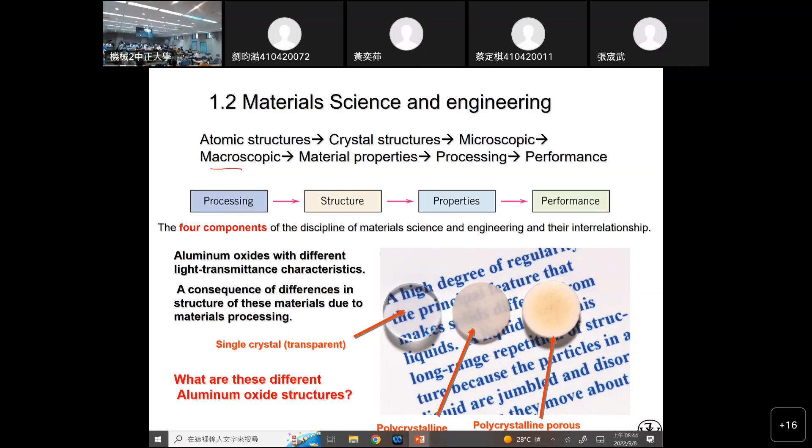Then we are going to talk about the material selection process. How do you select a proper material for your specific application? For example, if you are an engineer in an automobile industry and you have to choose a material for a certain automobile shaft, how should you select it? So first, application—you have to determine the application.

So first you have to determine the required property. What is the required property for a shaft? The shaft must exhibit certain strength. Strength is the mechanical property—we have yield strength or fracture strength.

Yield strength means that the material deforms. If the material deforms, then it becomes useless, right? If a car's shaft deforms, it can't be used. So the required property is the yield strength—the external force you apply cannot exceed the material's yield strength.

So you have the property. Here we were talking about mechanical property. Then in another course, strength of materials, which you are also taking—that is 材料力学, right? So you are taking the course Strength of Materials.

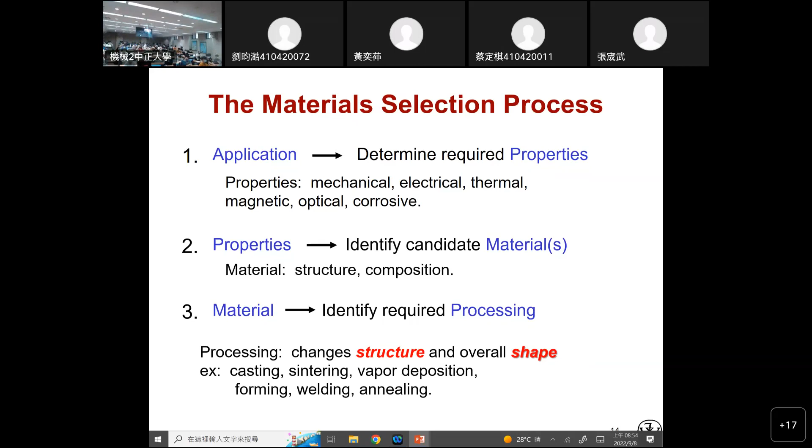And welding, 叫做焊接: you join two pieces of metal together with the electric arc, because the electric arc melts a part of the material, so that the two parts of the material will be joined together. And this is the welding process. Or annealing. Annealing is a kind of heat treatment. We are going to deal with that later, so I just skip that.

So we are going to study the crystal and the crystal structure in chapter 3, 4, 5, and if we have already learned the structure, then you will find why the material behaves hard or why material behaves soft. It is because of the structure. So we are going to learn the mechanical property in chapter 6.

Okay, and in chapter 7, look here at this vocabulary word, defect. What is the defect? 缺陷. Crystal structure or periodic structure is a perfect structure, an idealized structure. Just imagine that if this class is completely filled with students, there are no vacancies missing in this classroom, and this classroom becomes a perfect classroom.

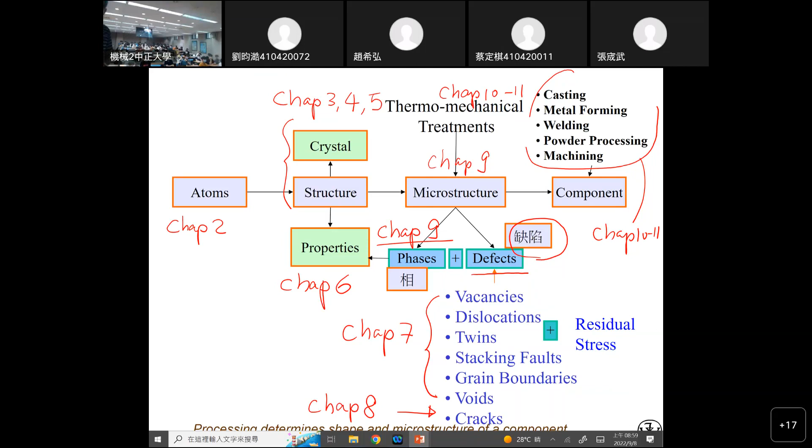And here you see, if I put a piece of steel into a furnace, and I heat the steel from room temperature to 1,000 degrees C, or even higher, 1,200 degrees C, so that the material is very hot and glows, okay? 会是热的，整个都发亮的。

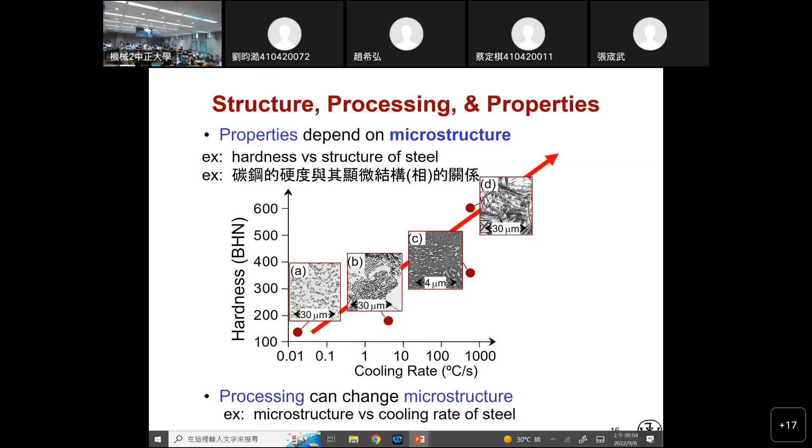For example, one of my graduate students told me many years ago, he graduated from graduate school and then worked in a company called Jong-Ning, okay. And during that time, Jong-Ning also developed a cell phone, not a smartphone at that time, 20 years ago. And maybe when you were a child, you could still remember a cell phone was quite complicated, and you had to unfold the case and press it.

Okay, and there are also cell phones with folding sides. So there are a lot of mechanisms on that cell phone. 就以前的手机哈，跟手机有许多的设计的这个机构 machine design。 And that student came to me one day and proudly said, oh, sir, look, now one type of the cell phone is quite famous in the market.

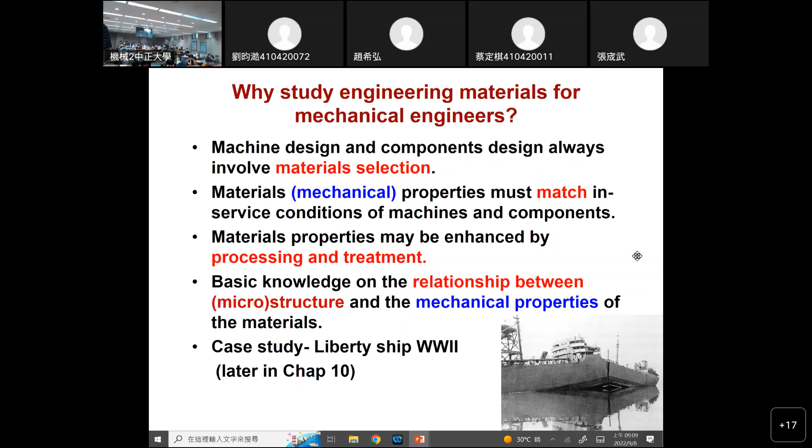But it's very dangerous or vulnerable if the ship is on the sea and suddenly it breaks into two; it will lose property, it will lose lives, right? So this is the goal of mechanical engineering, to learn about materials.

Now we are going to go into the topic of material. So classification of material, okay? Classification 分类. So basically, there are four categories of material. The first one is metal, and the second one is ceramic. The third one is polymers, and the fourth is composite. Composite means the combination of all these three.

Metals: steel, aluminum, all kinds of metal, so you know. And ceramic. More ceramics are applied in engineering or in advanced engineering materials. 陶瓷材料. Yeah, ceramic material is very hard. However, ceramic material is brittle. What is brittle? Brittle means ceramic material is quite

I could not write properly. Brittle. Okay, I'll write it later because there's some problem with the writing.

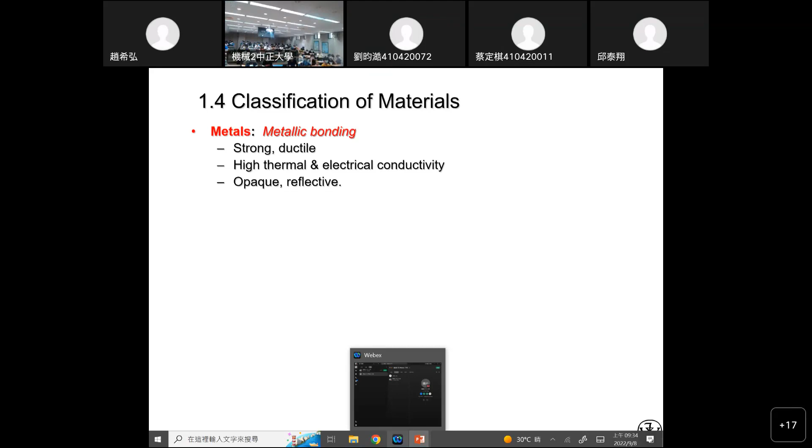And polymer: most plastics belong to polymers, or rubbers, natural polymer material, 橡胶 rubber. I just mentioned PE, PVC, PPT, and so on. Polymers have covalent bonding. Covalent bonding 叫做共价键, and it means that atoms share electrons with other atoms, so that they build a covalent bond by sharing electrons.

And polymers are typical plastic materials, 塑胶材料, and they are soft, they are ductile, and they have relatively low strength, not as high as metallic material, and low density. Low density so that it is light, and some of them have density even lower than 1, so that many plastics can float on water.

And they are thermal and electrical insulators, so we cover the electric wire with polymers, with plastic. And we also use plastic as thermal insulator. For example, your cooking pot handle uses plastic material to protect you from burning.

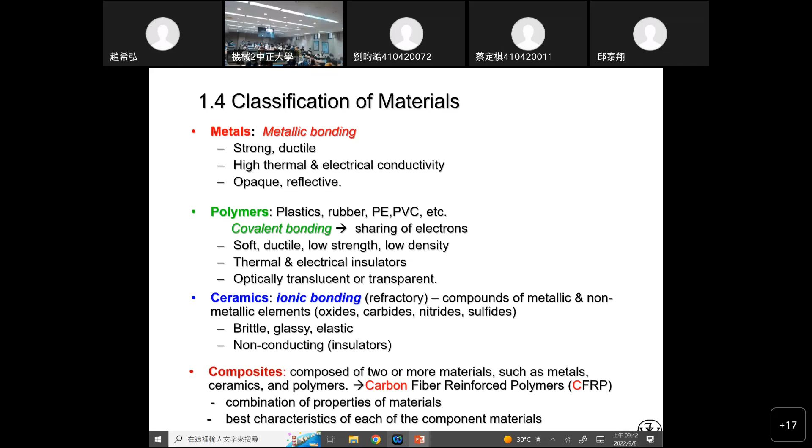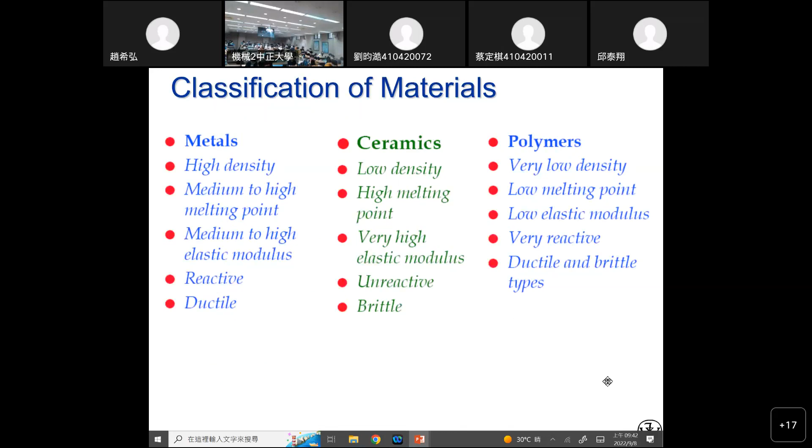So during steelmaking or other metal making, usually the slag is floating on the liquid metal because of its lower density compared with metal. Slag is a ceramic material, so its density is usually lower.

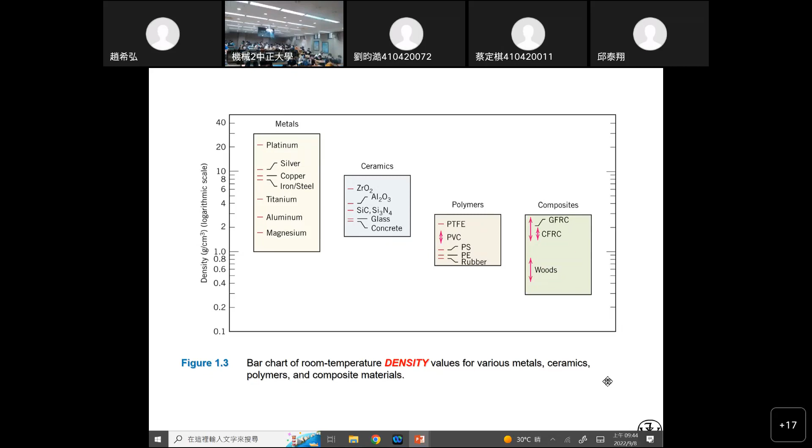And some polymer materials may have density as low as 1, so that this material will float on water. And composite depends on what kind of materials you're combining, so its density lies in quite a wide range. And then we see here the stiffness. What is stiffness here?

Stiffness is actually the elastic modulus, exactly like the spring constant. But in strength of materials we are talking about Young's modulus, that is the elastic behavior between stress and strain. Elastic means if you apply the load and it bends, and you release the load, it goes back to its original shape.

So the higher the elastic modulus or stiffness, the harder the material will be. Metal and ceramic both have very high stiffness, and polymer is quite soft. Look here, it's not the regular scale, it's the log scale. It's pretty high for metal and ceramic, quite low for polymer, and composite is the combination between them.

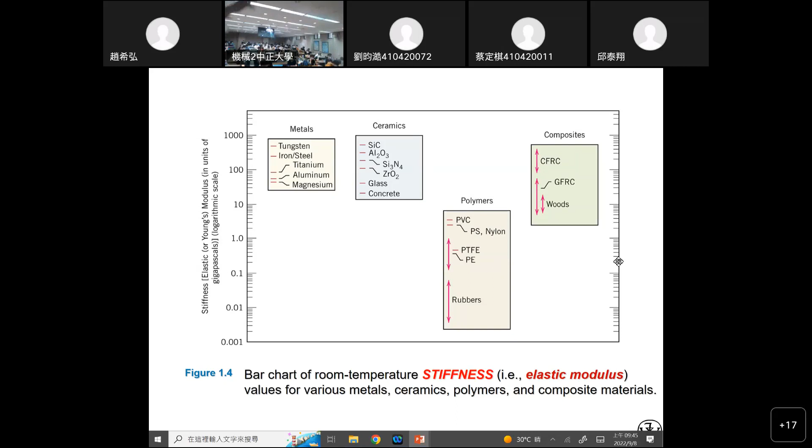And then the next property is strength. We express that on the scale of stress, that is force divided by area, and what we get is called

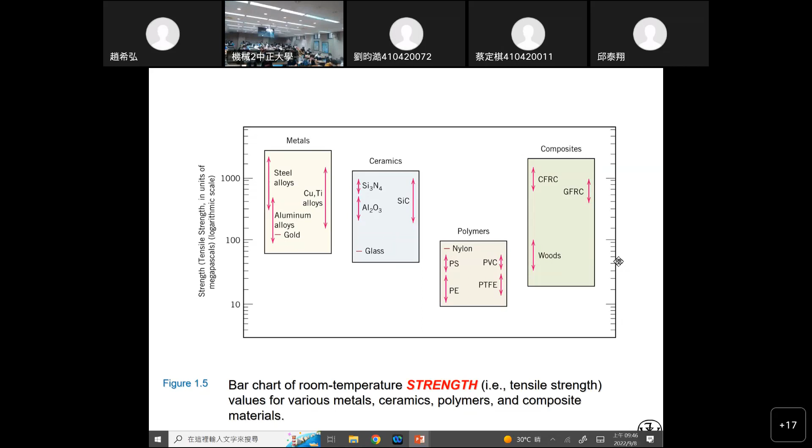polymer is far below, because again this is a log scale, not a regular scale. And then here, the resistance to fracture. Yes, this is quite a new concept. Usually we only consider the strength of material. I think everyone knows glass.

Glass, you may say, is a polymer material. No, it's a ceramic-like material, but actually it's not ceramic. Anyway, glass is very hard, but hard is not equal to high strength. Its strength is quite high too, but you will not use glass as a mechanical shaft or an important component to resist loading, right?

Why don't you use glass for those? Because glass is extremely brittle. Once you throw a small stone at the glass, it breaks. Why? Because glass cannot resist fracture. And also ceramic, compared to metal, is quite poor in resisting fracture.

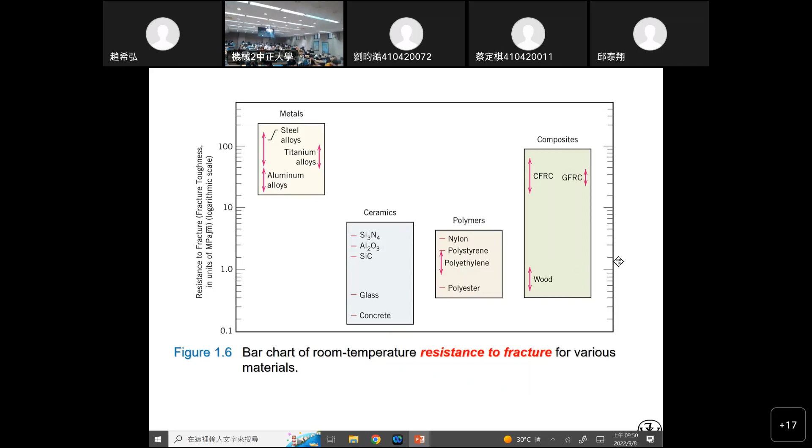Okay, then we're going to talk about advanced materials, and the first one is semiconductor. From the periodic table - maybe some of you have already forgotten the periodic table, but please get it back. We still have something to say with the periodic table because the materials we are using belong to one or some of the elements in it.